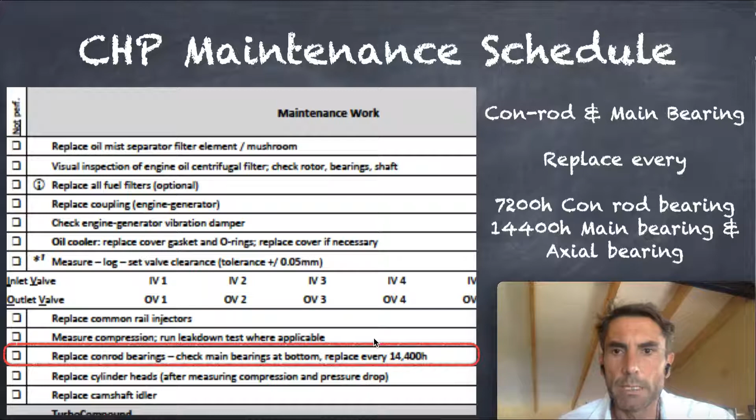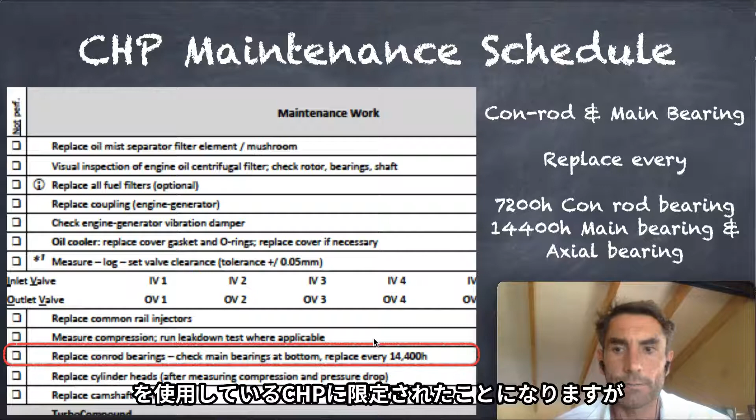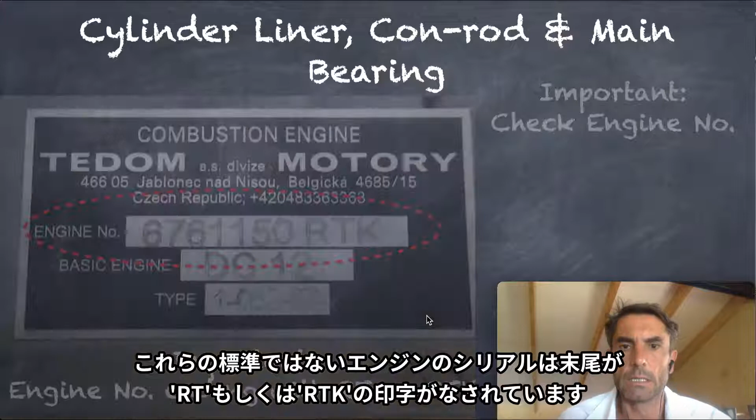We realized at some overhauled or new or rebuilt engines from Schnell that there are some special items needed if you have to do the 7200 or as well the 14400 maintenance. This is additional information on the number we get from Schnell. It could end with RT or with RTK. So let's have a look what that means.

So we have the engine where the engine number ends with RT. That means we have an overhauled engine. The second information means the engine block got drilled out with an oversized cylinder liner. So we have to keep in mind, if we have to work on the cylinder liners, in case a cylinder liner gets broken, leaked, cracked, and we have to replace it, we always have to look at the engine number. If we find the RT, that means we need an oversize of the cylinder liners.

So it's important to keep that in mind. Otherwise the original one will not fit properly in and will not seal properly.

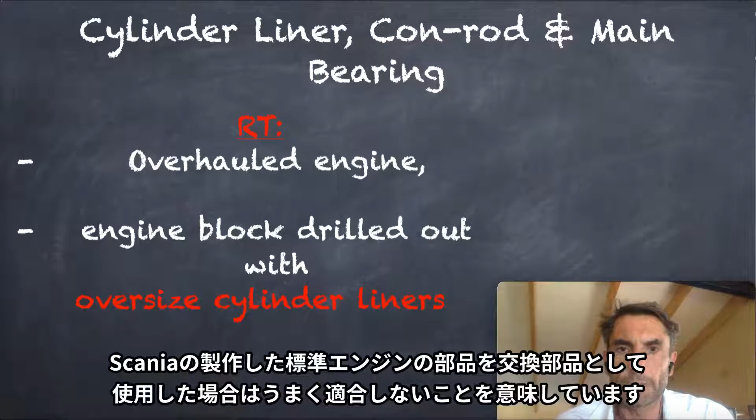Then we have the ending of the engine number with RTK. It's the same as RT, so it's a repaired engine. The engine block is drilled out with oversized cylinder liners. So here again we need oversize of the cylinder liners.

The crankshaft is machinated, meaning the main and connecting rod bearings are the first oversize now. I spoke to Schnell already, and there are only engines out with one oversize in Japan. So that means if the engine number ends with RTK, we have to focus on this.

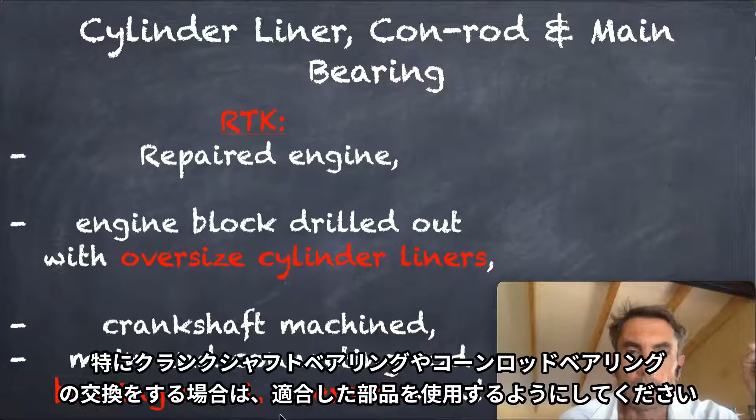If we have to do anything on the cylinder liner, we have to be careful that in case we have to replace it, we need oversize of the cylinder liner. If we do maintenance at the crankshaft or crankshaft main bearings or conrod bearings, focus on that we need the first oversize for that engine to do a proper maintenance.

The case we had was an engine with RTK on the engine number, and the bearings which we put in were actually the original, standard size. At the end of the day, after everything was put back together, we had a problem that after trying to start the engine, the oil pressure of the engine dropped after starting the engine.

So that happened because the gap between the bearing and the connecting rod was too big. So the oil pressure disappeared because the gap was too big.

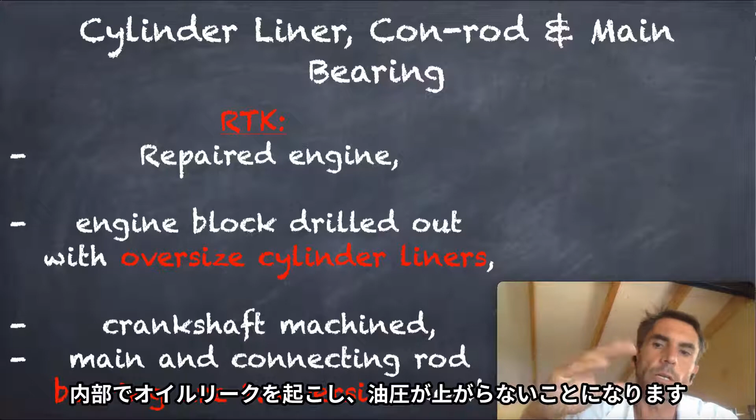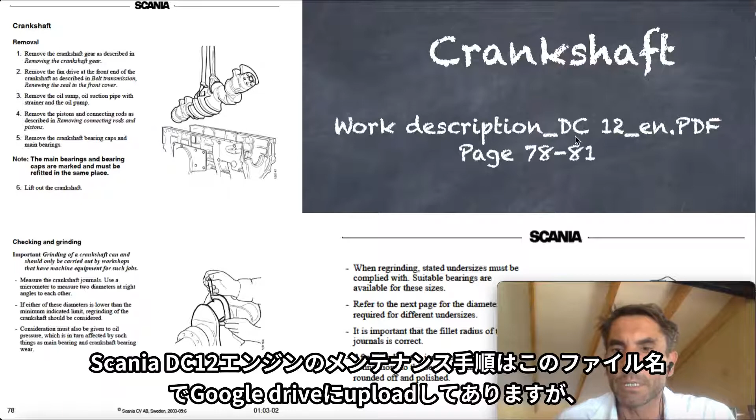On the crankshaft by itself, if we have to do work on the crankshaft, we have here the work description of the DC12 in English. You will find all this information on how to remove the crankshaft, how to measure the crankshaft.

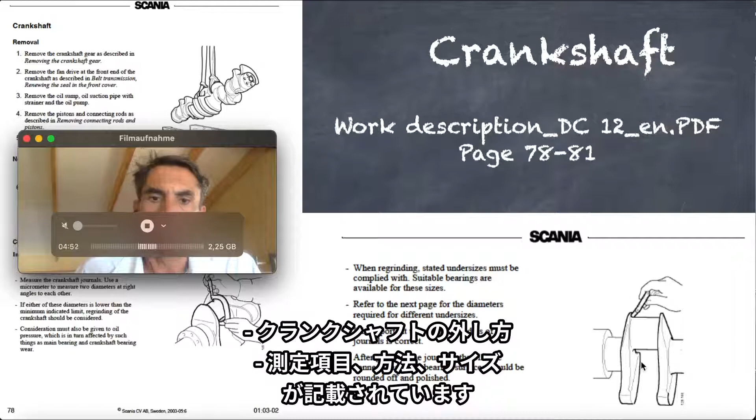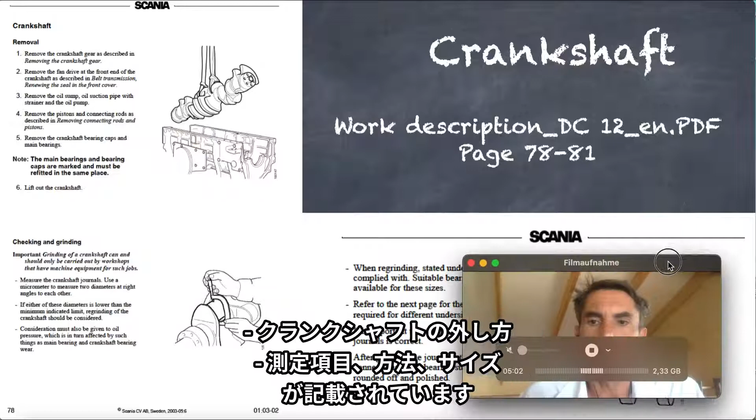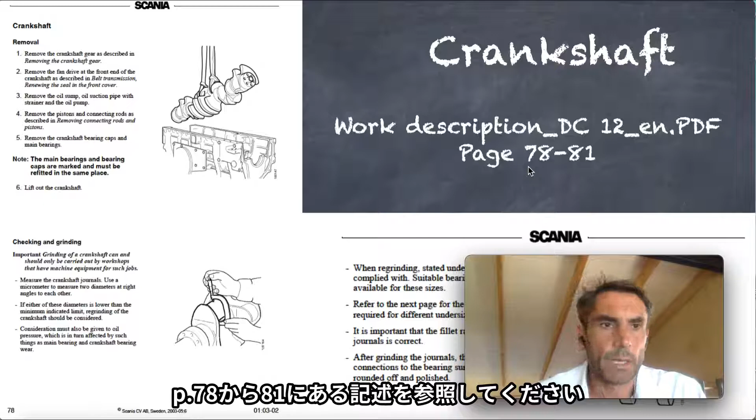How to measure the crankshaft by itself for the exact size. We have all this instruction here in our Scania maintenance or Scania description DC12. You can find it on page 78 until 81. If you think we need a more detailed video about that, please let me know. We can dive into that stuff deeper as well.

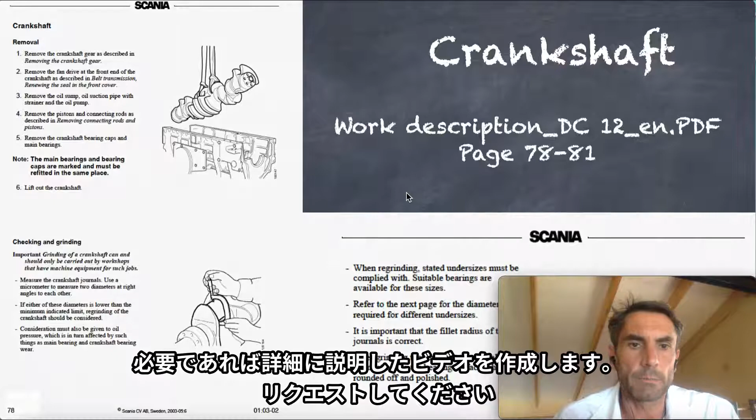We are still at the crankshaft. Here it's important that we follow exactly the steps to put the crankshaft back in again, put the bearing in, put the holder on, and follow exactly the instruction of tightening the bolts properly. For those bolts we have to tighten first with 50 Newton meters and then plus 90 degrees.

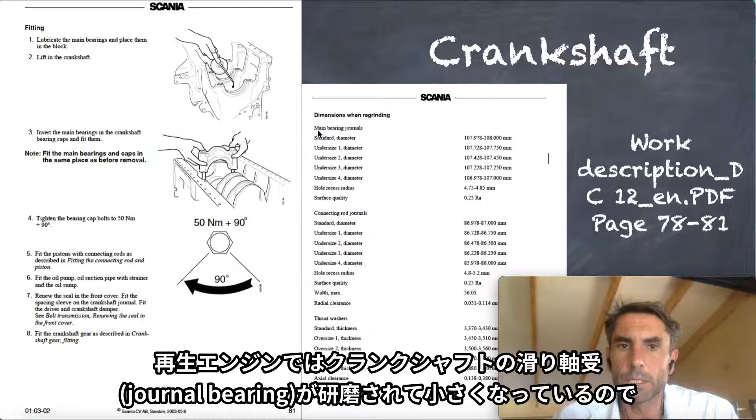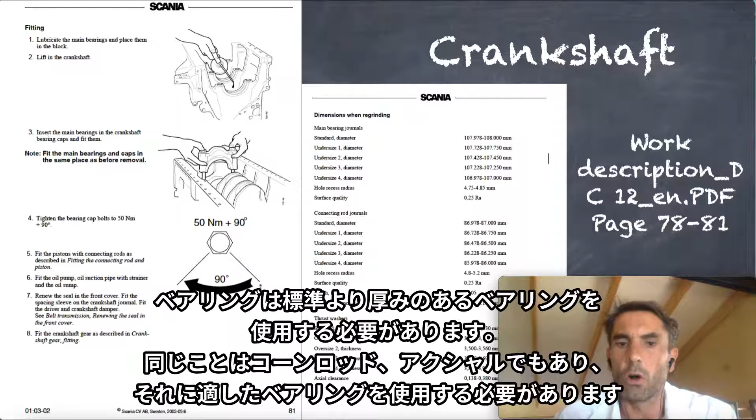You will find in the Scania document as well the information of the main bearing, the standard size, and the next undersize. They call it undersize because they are removing material from the crankshaft, so it becomes undersized, but the bearing must be oversized. The same applies for the conrod, and there are also some additional oversize options for the thickness of the axial bearing washer.

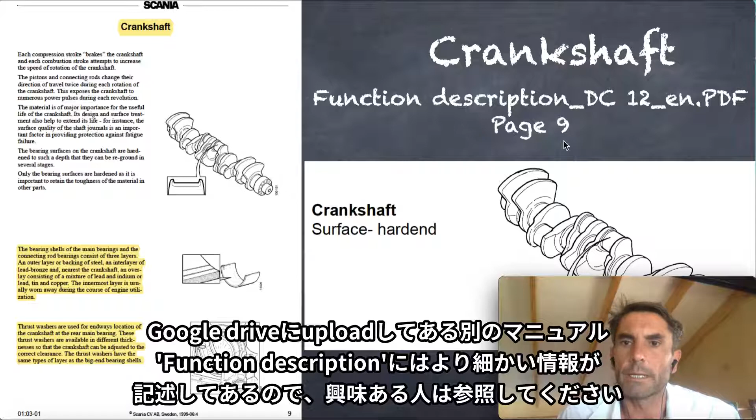This documentation is called the function description of the DC12, and you find more information about the function and how it works in that documentation. You can find it on page 9 if you are interested to dive a little bit deeper into it.

This must be replaced every 14,400 operating hours.

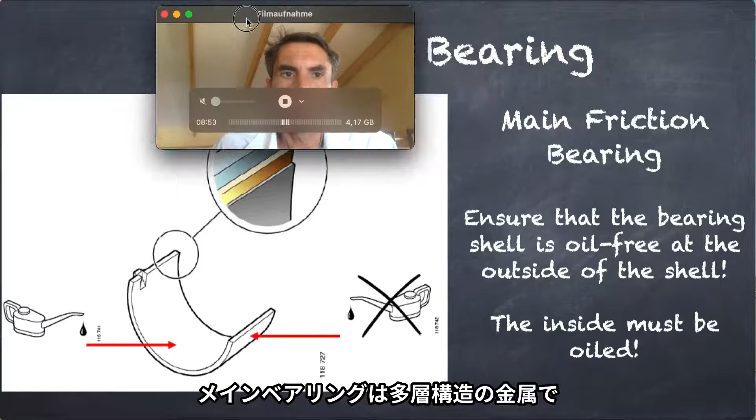Important here is we have again the shell, the bearing shell, with the different layers shown here. When we put it back, we should only put oil on the inside and outside of the bearing, where the mounting blocks are connected should or must be oil free. And again, for sure, the inside where the crankshaft is running, this area there should be oil before we put everything back together.

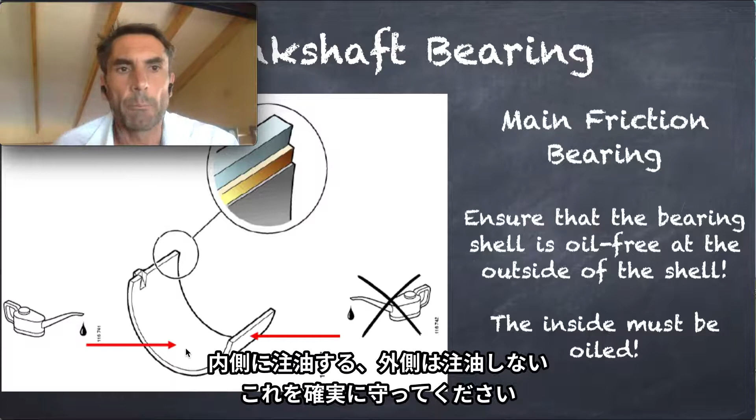So here we have the axial bearing. This thrust washer fixes the axial position of the crankshaft, so that the crankshaft doesn't have too much space or gap to move from the right to the left or from left to the right. That's the clearance, the limitation. And for that washer you can get different oversizes as well.

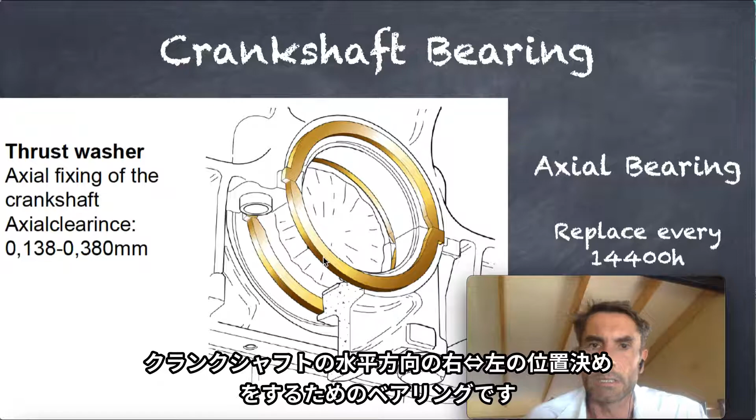So here, the crankshaft mechanism, we have the different torques, the information about the torques, the size of the torques, and how to tighten it. Here, important that we follow exactly the instruction of the torque, to put the right torque and angle on the bolts. Here again, to remember:

Renew the bolts every time. The same with the conrod. This is a special torque bolt, so if you use it once and open it again, you have to replace it. If one of these bolts breaks, it can cause a big engine damage, because if the bolt breaks, we will lose the hold of the bearing, we will drop the oil pressure immediately, and that can cause damage to the crankshaft, damage to the conrod, and actually to the whole engine block. So please remember that.

Renew the bolts every time. When you open the bolts, don't use them again. Please replace them every time. Ensure that you have the bolts available, and for sure all the other material, before you start with the maintenance.

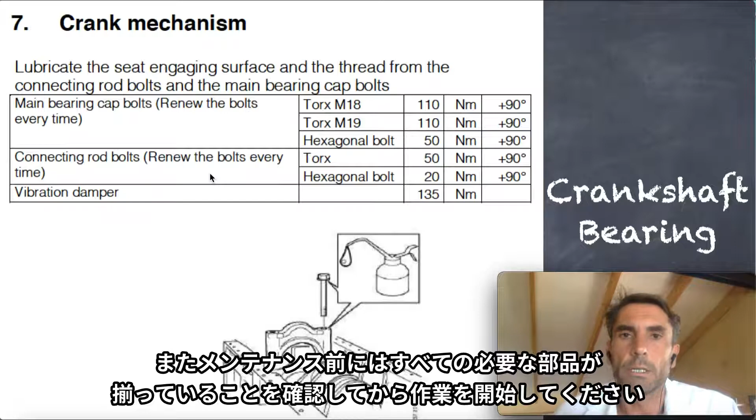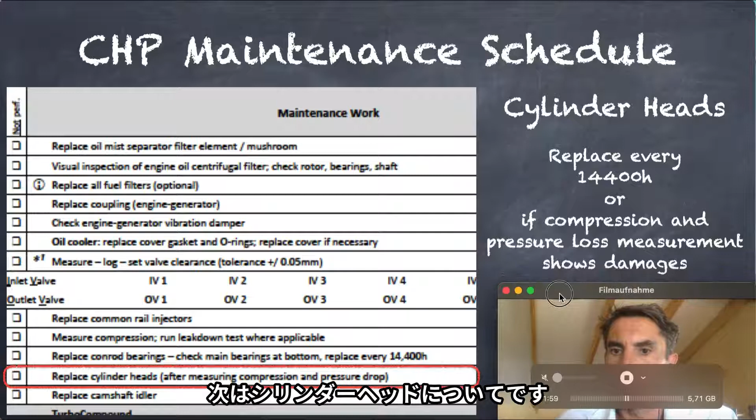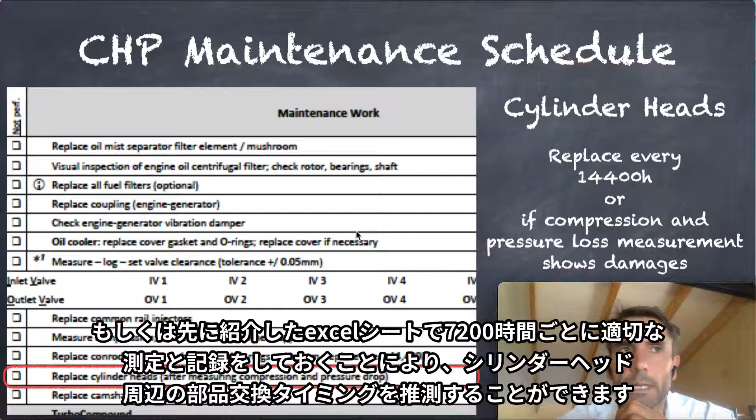So let's go to the next point here. The cylinder head has to be replaced every 14,400 operating hours. Or if you do proper measurement, I always recommend to do it every 7,200 operating hours, that we do the compression and pressure loss measurement, which shows us early enough if we have any problem on the cylinder head valves, or on the liner, or on the piston rings, etc. So usually the replacement is every 14,400 operating hours.

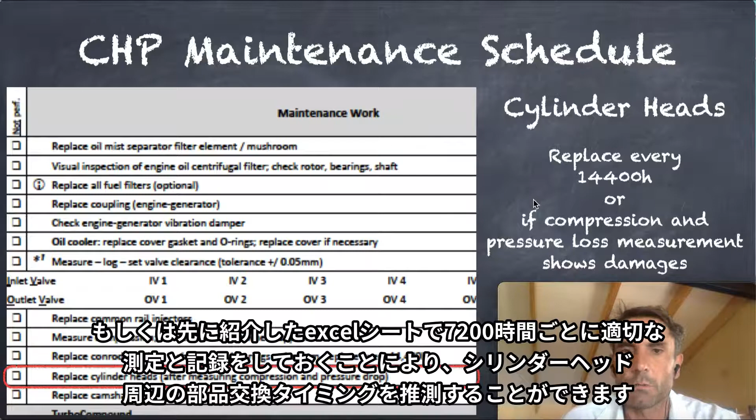If we do this measurement properly we can see which cylinders actually have problems, then we don't have to replace all the cylinders. That's why we usually do the compression measurement and the pressure loss measurement. And if we go through the document properly, use it as a proper report for later on as well, fill out all the information we need, and do the measurement properly, then it will show the information on which cylinders are in trouble.

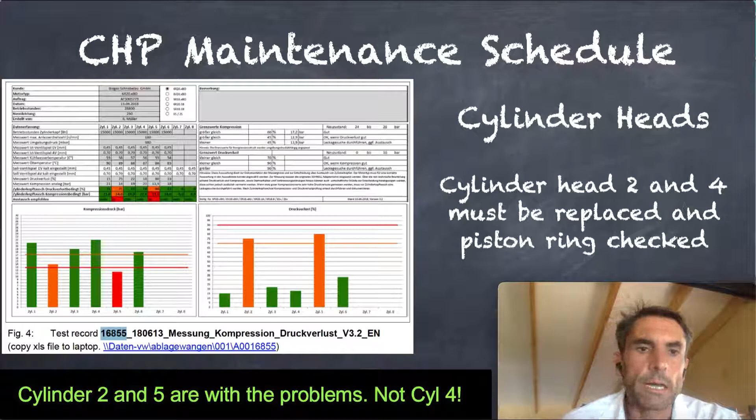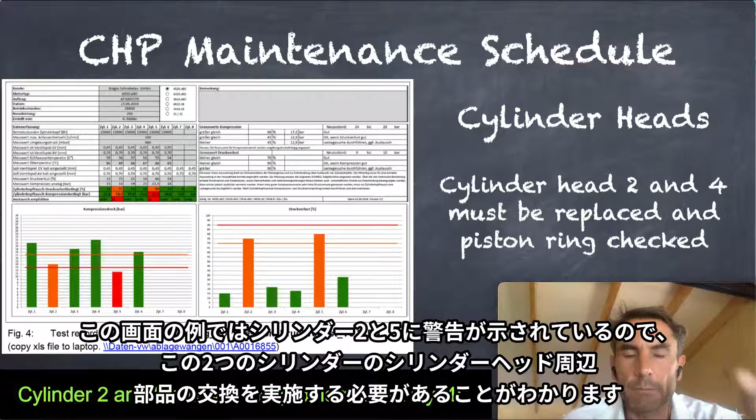In this showcase scenario, we can see the orange and red information on that side, and here the limitations of the compression measurement and the pressure loss. So we can see the double indicator that cylinder 2 and cylinder 5 in this case — that must be cylinder 5, sorry — must be replaced. That means we have to check the cylinder head, the cylinder valves, the liners or the piston and piston rings, so that we know what we have to replace, and at the end, when we've replaced everything and assembled it again, we put everything together properly and can operate the engine immediately.

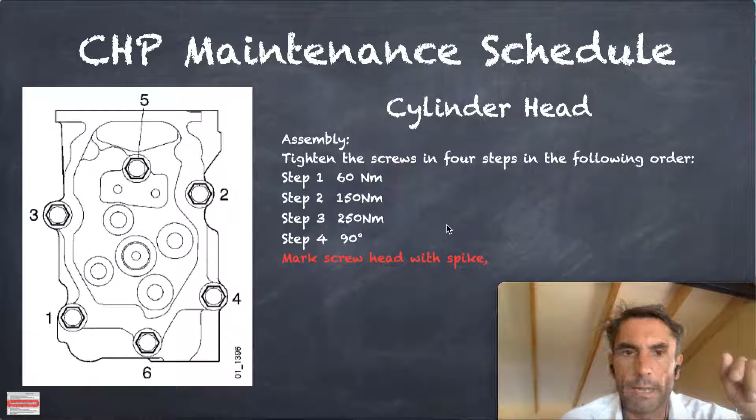On the cylinder head, it's important that we tighten the screws in steps. That means we have step 1, 2, 3 and 4. We always mark the screws when you tighten the first step, for example with one stripe or one dot, and then go further through all screws.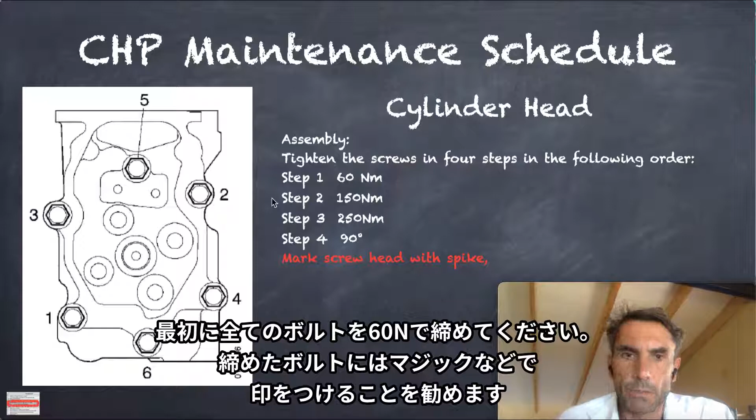So we tighten first with 60 Newton meter, all screws, marking all screws step by step so we don't forget one. We go to the next step, screw by screw, at 150 Newton meter, marking each one after you tighten it. Then you go to step 3.

250 Newton meter, mark each screw after you tighten each screw. Then we go to step 4, that means another 90 degree angle turn of the bolt.

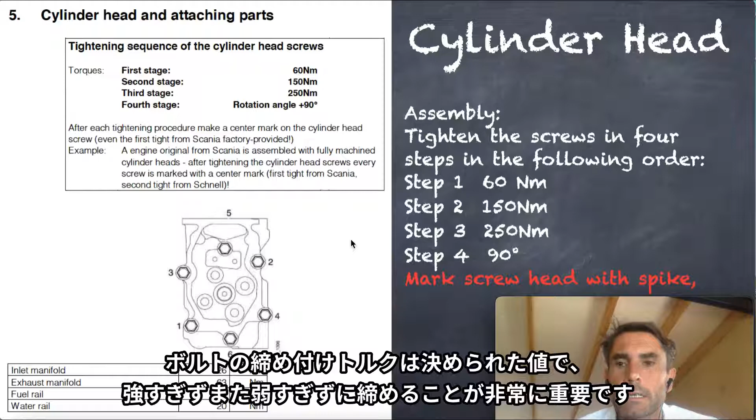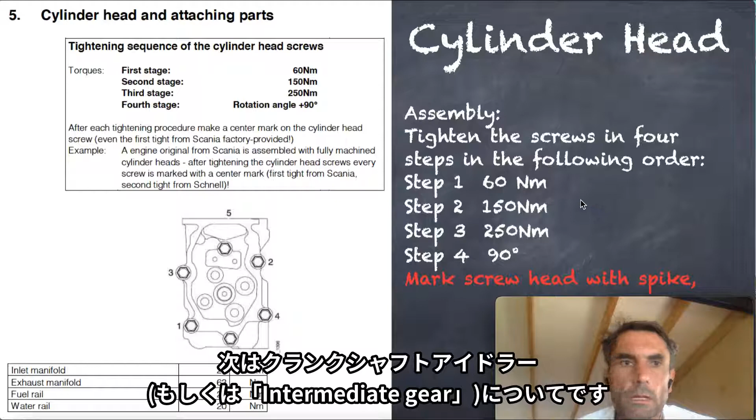Here we have some more information about the tightening of the bolts: at the inlet manifold with 26 Newton meter, the exhaust gas manifold with 63, the fuel rail with 20 Newton meter, and the water rail with 20 Newton meter. So the torque is always very important, we ensure that all bolts are tight, but not too tight and not too loose. Please follow this instruction and then go to the next steps.

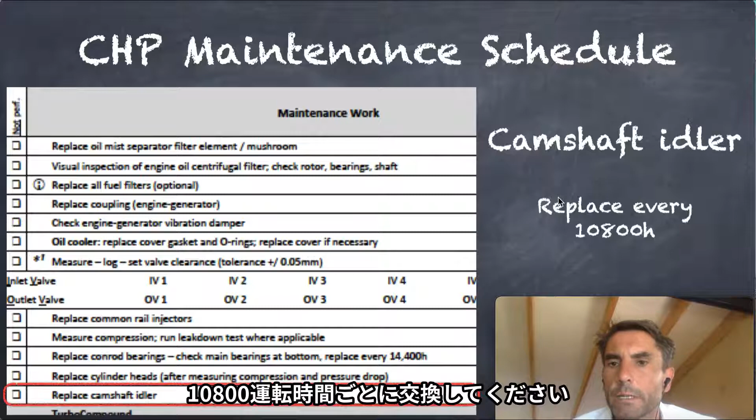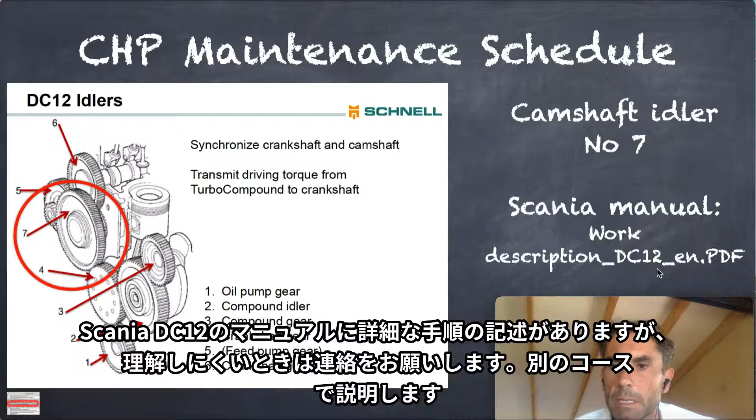Then we have the camshaft idler. It should be replaced every 10,800 operating hours. In the documentation here, there's the number 7 missing from Schnell. So the camshaft idler is here, number 7, that's that one. You can find the direct instruction in the Scania manual, work description DC12. If you need more details about that, let me know. We can go more and more in detail here as well, but you will find the information how to do the work in the Scania documentation.

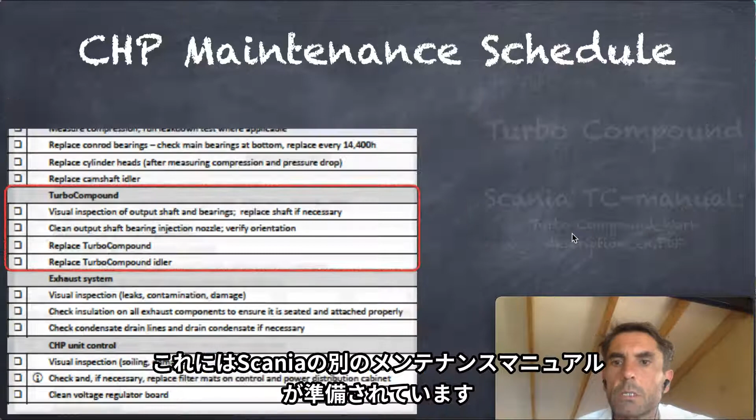So furthermore, now we come to the turbo compounder. I had sent you all the documentations already. There is another description as well, a TurboCompound work description. You find it in the folder at the Google Drive. So look at this, that you get all the information about the turbo compounder as well.

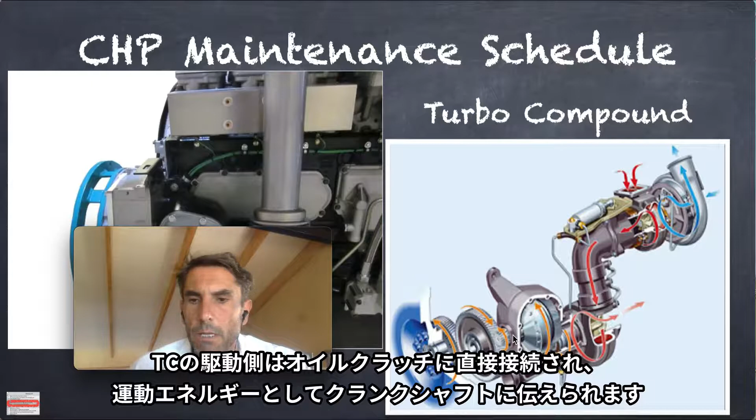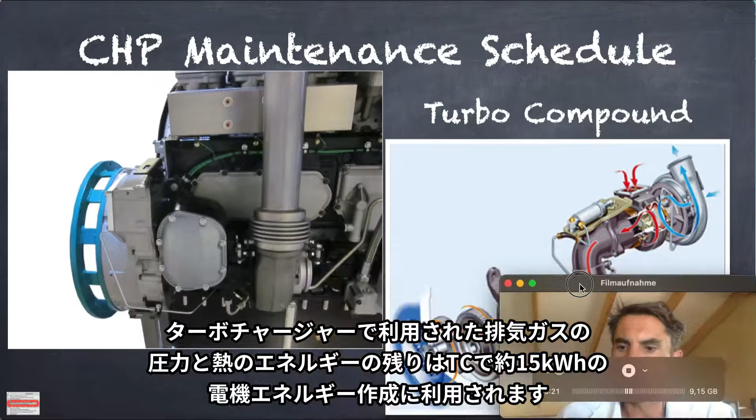In the meantime, you should know, we're talking about the turbo compounder. There's this unit here, it's connected here to the back of the engine. Here the exhaust gas is running through, it's turning the turbine inside. So here again we have our usual turbocharger. We get the exhaust out of the engine, turns the turbocharger. From the turbocharger it goes to the turbo compounder, and that turbo compounder is connected via oil clutch to the backside, and then from the mechanic directly to the crankshaft. So we're using the rest of the pressure and temperature from after the turbocharger, from the exhaust gas, to get an additional 15 kilowatt out of the exhaust gas onto the crankshaft.

First maintenance we always have to do on the turbocharger and turbo compounder is the shaft and the bearing. So we have here the shaft and the bearing. This must be replaced every 3,600 operating hours. We had on some plants already many problems and high costs because we destroyed the complete turbo compounder, because we didn't do the proper maintenance on the smaller parts at 3,600 operating hours, and as well on 7,200 operating hours.

Important is that we have a proper clearance to adjust the backlash, and then we can have a proper clearance so that the gears are going nicely into each other and not be under pressure. If we get under pressure here, we get pressure on the bearing as well, so we can damage the bearing and shaft. The next thing will be to check the injector nozzle that is free and directed directly on the bearing.

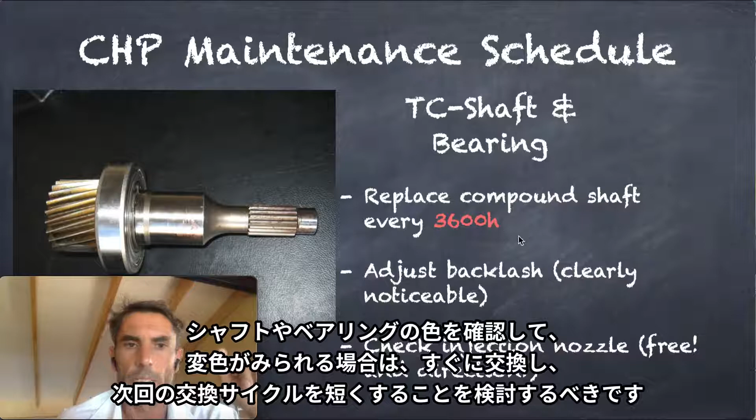If you can see, actually, if the bearing gets hot because the bearing gets old, or the gaps are too big, or there are some problems, then it's starting to get hot, and you remember when steel changes color, then it's a sign that this area gets too hot, and we should replace it immediately before we get any problems on the bearing. If the bearing breaks, the shaft can break, and then the complete turbocharger, turbo compounder can break.

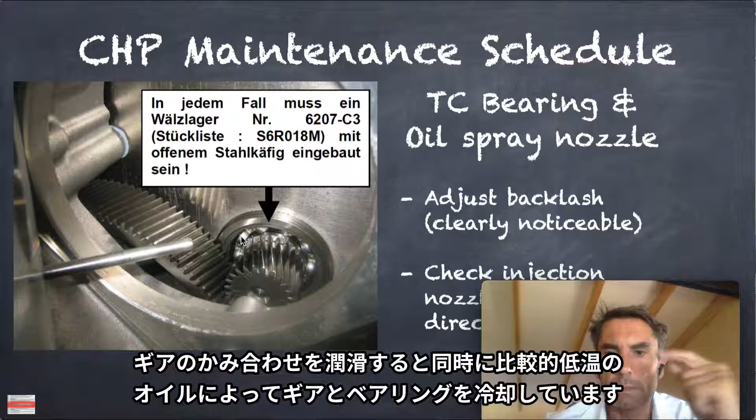Here we can see the nozzle. This is the oil nozzle, actually, what sprays oil onto the gear and onto the bearing. That's very important that we use here the right bearing, so this open housing bearing, so that the oil can go into the bearing. There's two things: one thing is we give more oil so it can run easier, the next thing is we get oil which can cool down the bearing. So that's very important that this is running nicely, and that we do the maintenance of the bearing and the shaft and check the nozzles every 3,600 operating hours.

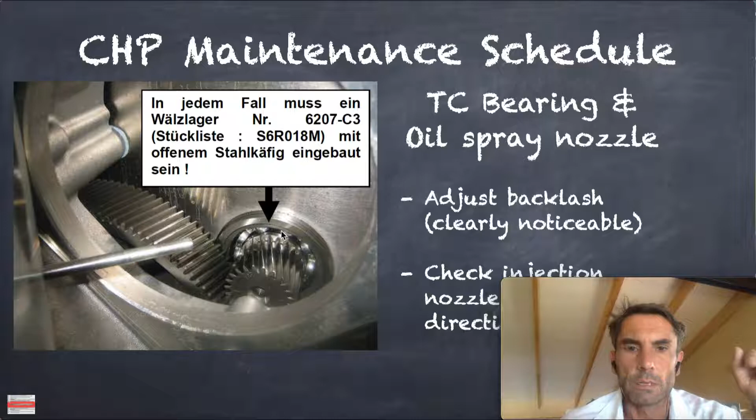At 7,200 operating hours, we have to replace the turbo compounder. I have many systems running. If we do a proper maintenance, we can extend these operating hours. This is a standard from Schnell that says, okay, we have to replace the turbo compounder every 7,200 operating hours.

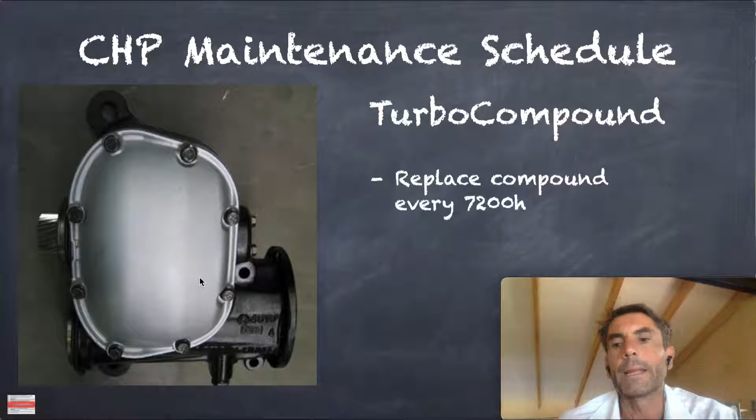I have systems running with over 10,000 operating hours. If we do a proper maintenance on the bearing, on the shaft, and ensure that we have proper cooling from the oil nozzle, we can actually extend that. But we keep monitoring the shaft so that we can see if the bearings are still working nicely, running soft and smooth, and if we can see that the shaft is still fine, then we have the option to say, okay, we can run longer than the 7,200 operating hours. But the bearing, the shaft, and the nozzle always must be checked and replaced at 3,600 operating hours, and we save a lot of cost and time and damages on the turbo compounder.

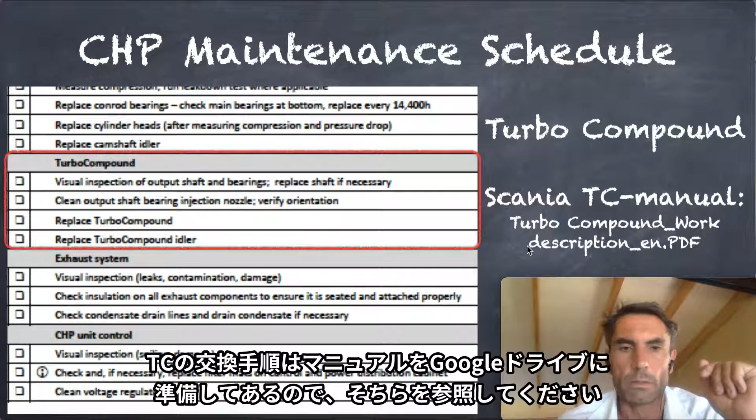Yeah, okay, so we have this instruction. Please have a look on the turbo compounder work description as well. And if there are further questions, please let me know. Okay, jump to the next.

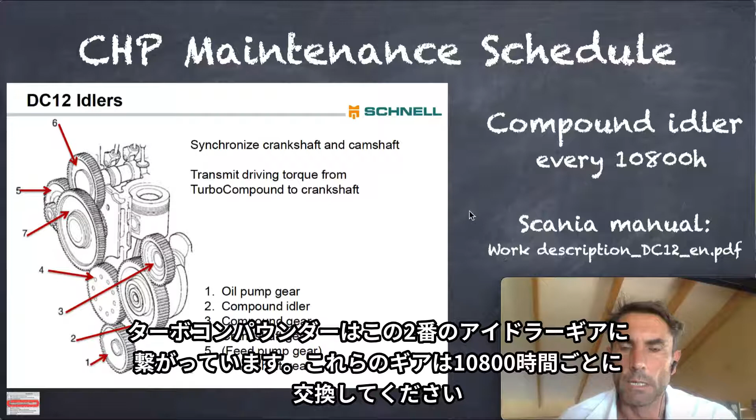So this is actually on the opposite side of the compounder. We have the idler, this is the gear here. We have the compound idler, this is that one. That connects actually the compounder and the crankshaft with each other. This must be replaced and checked every 10,800 hours. You will find the work description in here. And if you need more information about that, please let me know, and we can prepare the stuff for you.

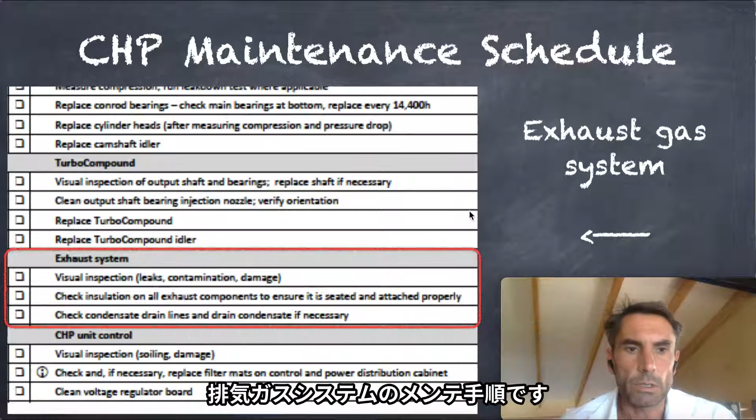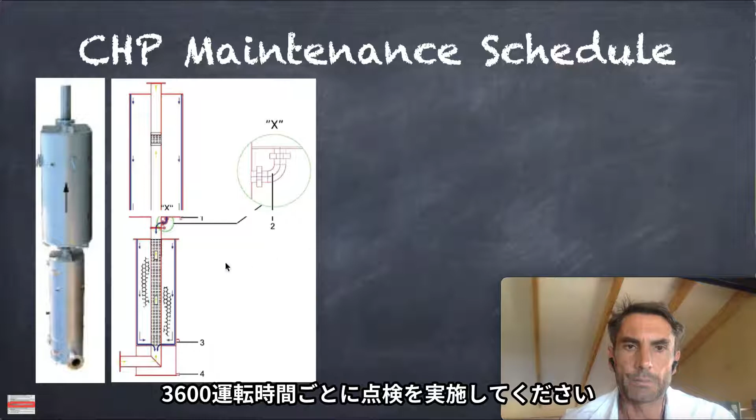Okay, exhaust gas system. First thing is that we actually have to always inspect the exhaust gas system, that we ensure that every 3,600 operating hours we check the exhaust gas system if we can see any leakage or something else.

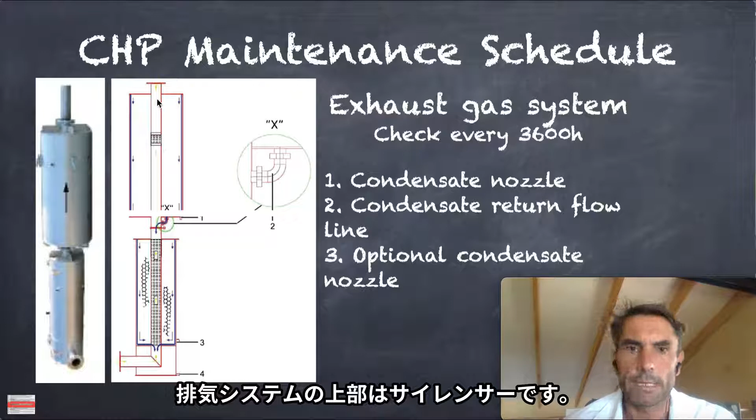So we have number one. Oh, the number is very bad to see. We have here at the top piece of the silencer, the piece here on the bottom, we have a condensate nozzle, so we can open that nozzle, we can release if there is condensate inside of the silencer. Usually the condensate return flow line, that's that one here, connected. So the condensate usually, but we have to check if this is blocked, then condensate will fill up in the exhaust gas silencer.

Usually the condensate will come down here, goes back into the pipe. The heat of the exhaust gas will move a lot of condensate out of the exhaust gas pipe again, but still there could be enough condensate running back. And there is an optional condensate nozzle on the bottom as well. So in case we get condensate here, the condensate can get out here.

Always remember, in the condensate, in the exhaust gas, you can have a lot of dirt stuff as well. Especially if we operate with a high H2S content, for example, or with other poison stuff in the gas, what can force that we get stuff into the condensate, and then it can start to block that connectors or the nozzles as well.

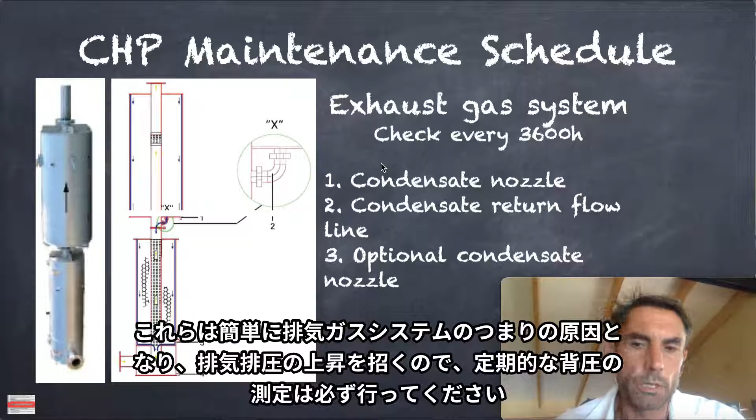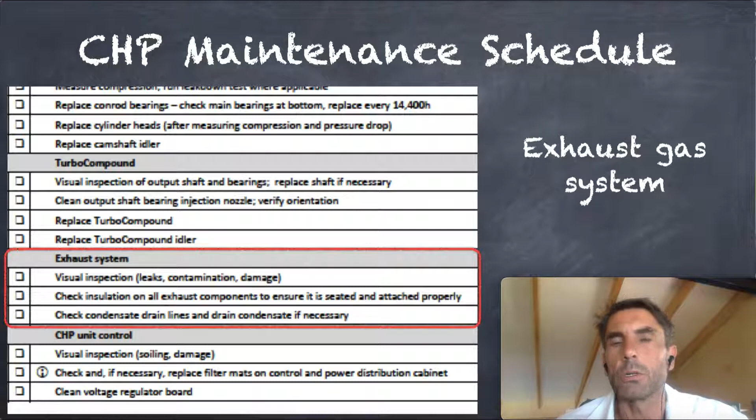That's why we always have to check every 3,600 operating hours that the nozzles and the connectors are always cleaned. And I recommend to do exhaust gas measurement at least every 7,200 operating hours, so that we know what is the back pressure on the system, and know if we have any blockage or damages inside of a silencer, to ensure that we don't get further problems on the engine.

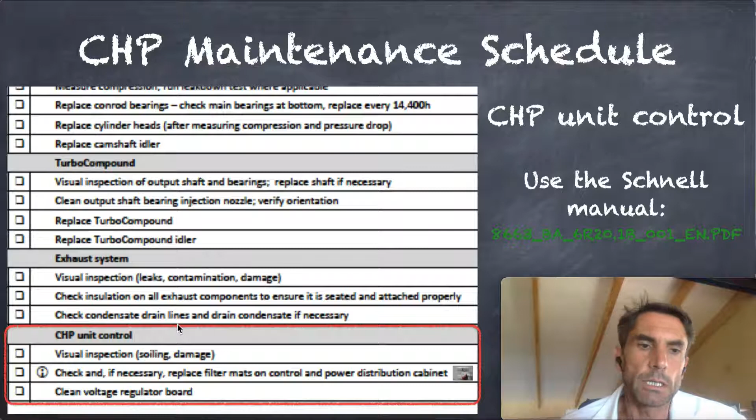Here we have the standard inspection of the CHP. You will find in the documentation of the manual, Schnell manual document BA 6R20 1B. You will find all the information about the Schnell CHP, and then you can go through that inspection as well.

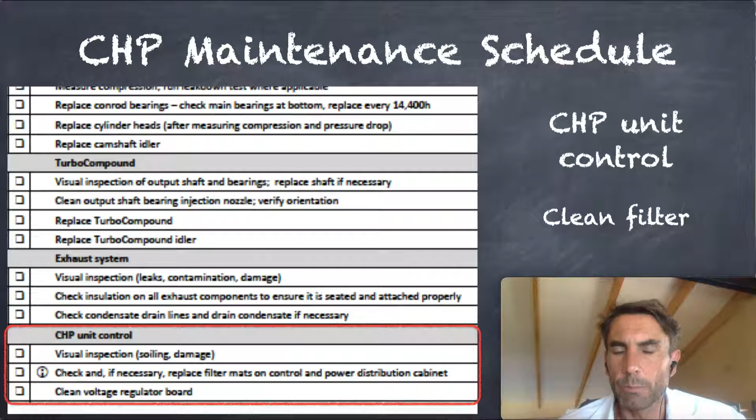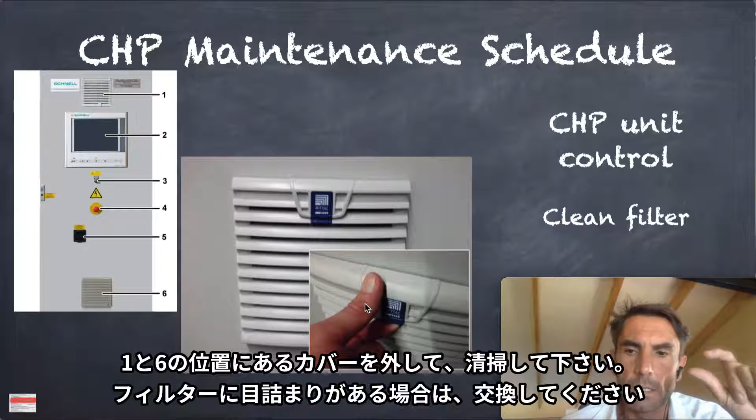First of all, we're looking on the CHP unit control panel. So the control panel is the panel where the panel PC is settled. We have to check and clean that filter and that filter. You'll find in the Schnell manual the instruction how to open it. There's a click, you can open the front side, then you will find inside a filter inlet. You can clean that first time. If it's getting too dirty, you have to replace it.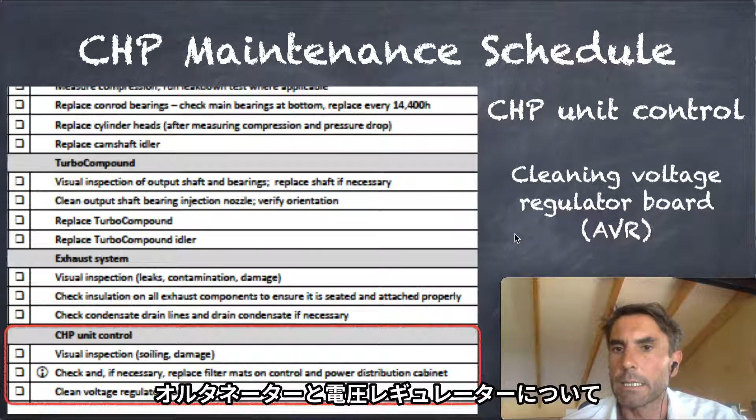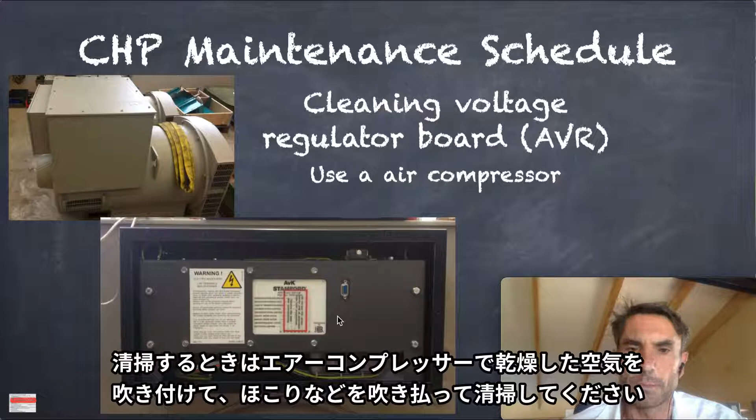Then the next one is cleaning the alternator voltage regulator board. If you look from the side, the power board, or the regulator, the AVR, you will find on the back side. So the alternator in front will be the engine, and here on the back side this is the control unit for the voltage control of the alternator. If you clean that out, please always ensure that the system is not operating, and if you clean it, only use an air compressor, so that you clean that area out, that all the dust goes out, and that the regulation can't get any problems. Okay.